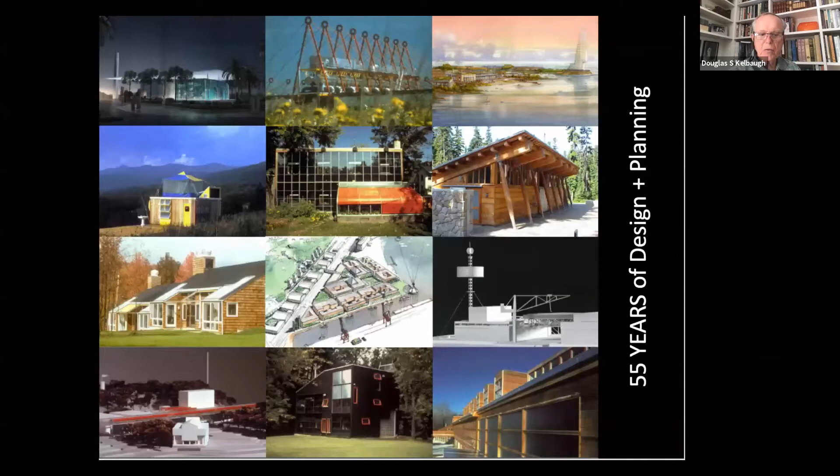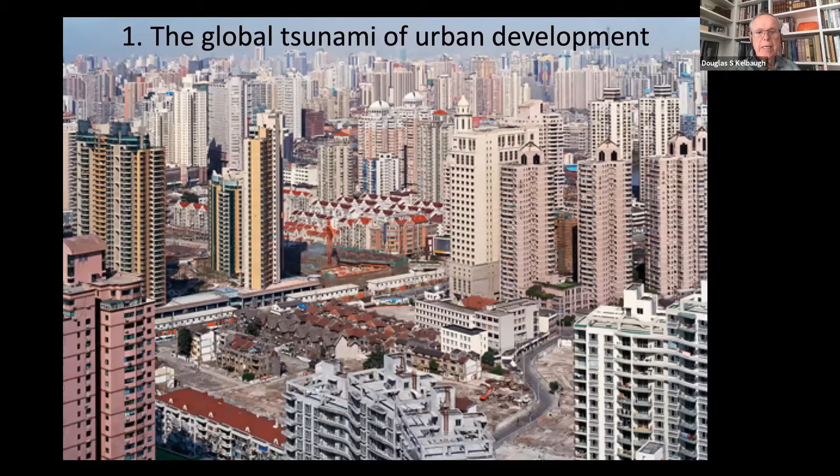Here we see the percentage of global population that's rural dropping as the percentage of urban dwellers increases, about 6.3 urban dwellers to 3.2 rural residents are predicted by 2050. So we're getting more urbanized. 83% of all Americans live within urbanized areas.

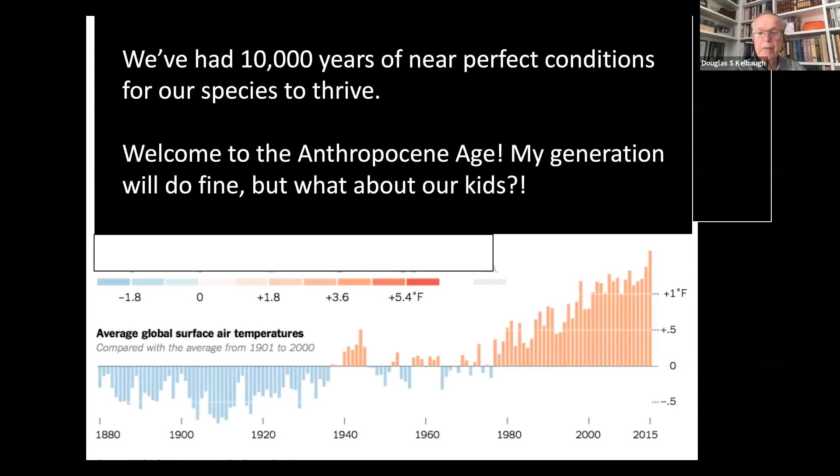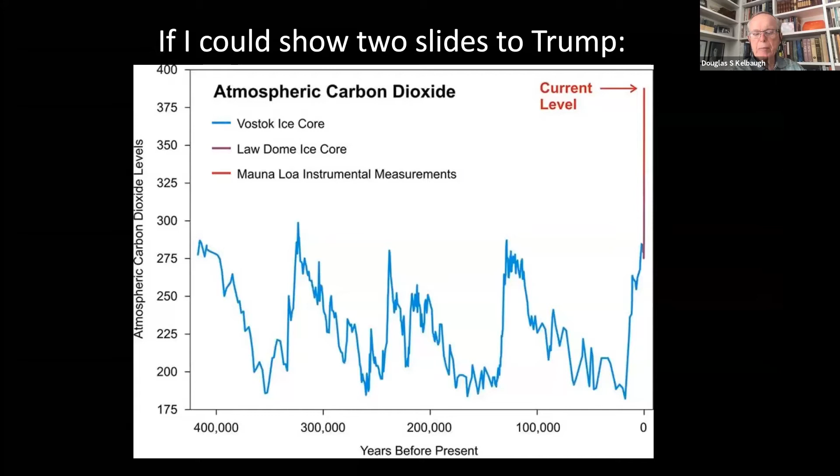If I could show a slide to Trump, a couple of slides, this would be one of them. He keeps saying, yeah, the planet's getting warmer, but then it'll get cooler. We have had that cycle going on every 100,000 years or so for quite a while. But look at the current CO2 in the atmosphere. It's jumped much higher than it's ever been in those previous cycles. So we're in a new terrain.

Ecosystems, unlike organisms, unlike animals, don't have to die. They live for a long time. Think of the ancient cities of Athens, Rome, Beijing, etc. When a bird flies over a city, it doesn't think, oh, I'm over a city now. It sees it as one continuous ecosystem.

Which leads me to a major theme of my book, the environmental paradox of cities. When people cluster in dense, mixed-use cities rather than in suburban sprawl, they have a smaller ecological footprint. There's no doubt about it. Cities have a big eco footprint.

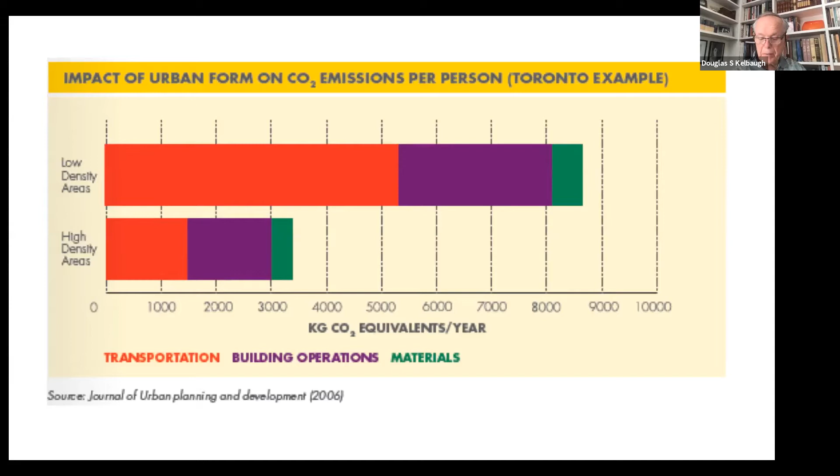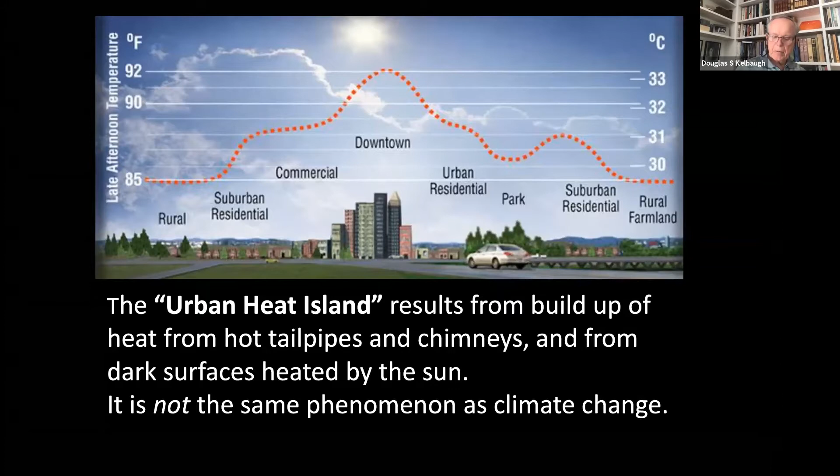So here we go. The urban heat island, you all know what that is, I think. It's much hotter downtown than in the suburbs and countryside because of heat from tailpipes and chimneys and more pavement that gets hot, hotter roofs, so on. Large cities in the US tend to be warming at more than twice the rate of the planet as a whole, or their countries, or their rural hinterland for that matter.

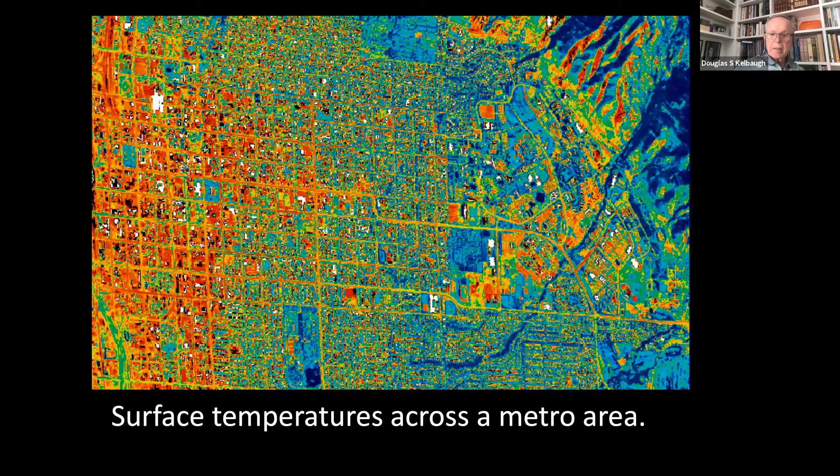Global estimates of climate change are likely to underestimate the rates of warming in the very places where most of the world lives, which is in cities. Here are the surface temperatures, red to cool blue across the metro area, but we're lucky, very lucky.

Strategies to mitigate and adapt to urban heat islands are consistent with, in fact, identical to strategies to deal with climate change. And because urban heat islands are manageable in 5 to 10 years rather than the 50 to 100 years needed to slow climate change, there's a more immediate and palpable feedback. So I think urban heat islands can better motivate and activate people to change their behavior.

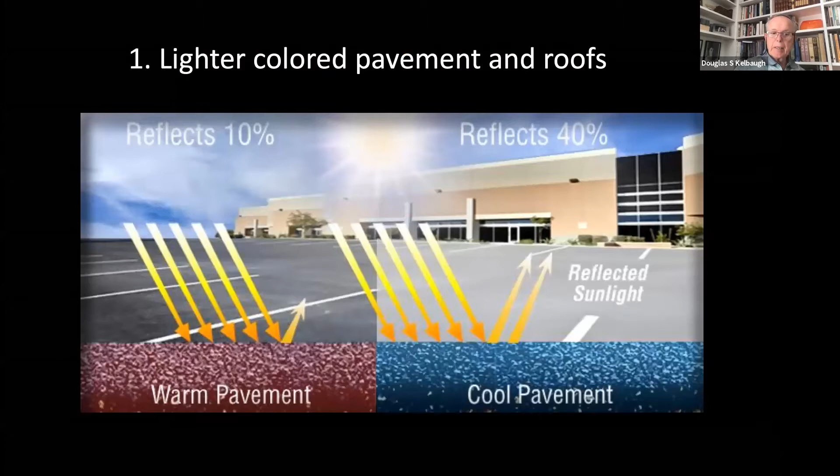And how do we deal with urban heat island? Lighter pavement makes a big difference, 4 to 1 lighter. A white roof is 4 times better than a dark roof. Green roofs with plants are more expensive, but they do other good things, including growing food. White paint is the cheap way to go.

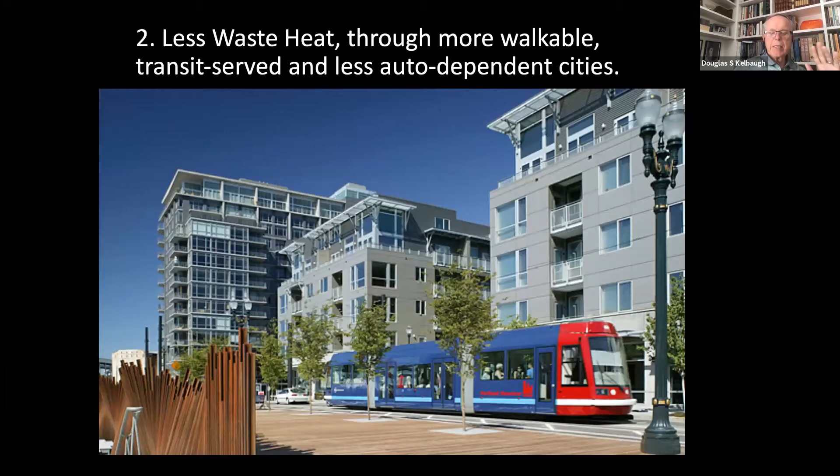So the second is less waste heat. That means more biking, more transit-served communities, less auto-dependent cities. Any of you in Mexico know that there are some bike share systems, actually free bikes that are available in the right place at the right time.

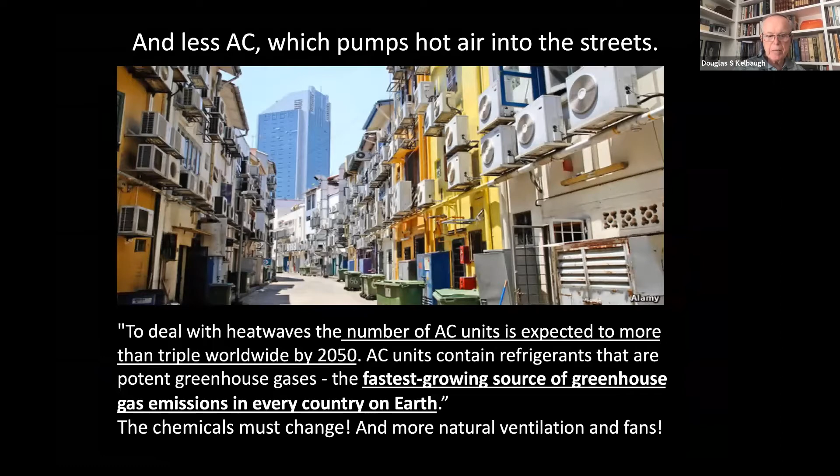AC is a big problem. It pumps a lot of hot air into the streets as it cools individual dwelling units. Dwelling units get cooler, the street gets hotter, and the number of AC units is expected to more than triple by 2050. It's the fastest growing source of greenhouse gas emissions in every country on Earth, developing and developed world. The chemistry of those is deadly.

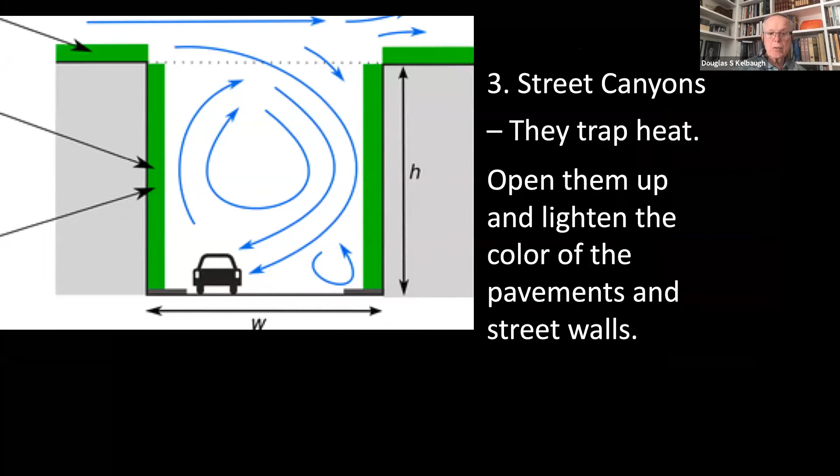There are a lot of reasons air conditioning is a problem. Street canyons, which Harrison originally turned me on to, they trap heat. Obviously, the higher the street walls, the narrower the street, the more heat that's trapped. We want lighter colored walls on those canyons and lighter colored pavements at the bottom.

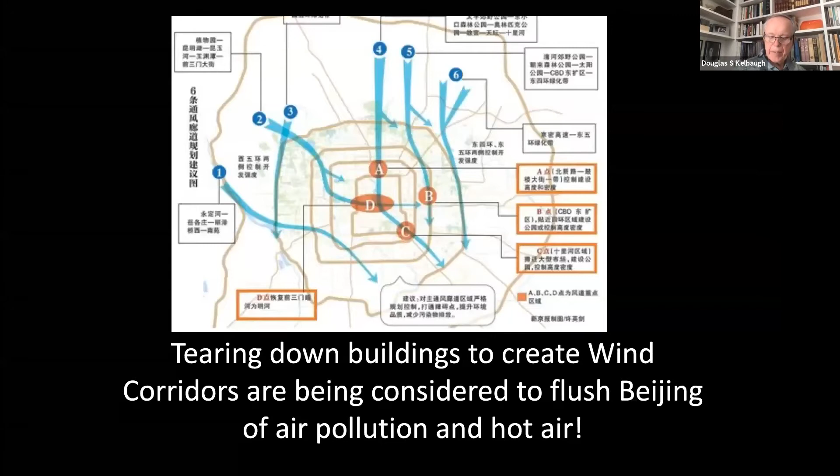So what can you do? You can eat a plant-based diet. You can avoid air travel. You can live car-free. You can have fewer children if you're of that age.

Here's some other ones. Eat locally. Compost your food waste - many cities collect composted food waste. Replace a conventional car with a hybrid or EV. I love my e-bike, but I like my road bike, street bike even more.

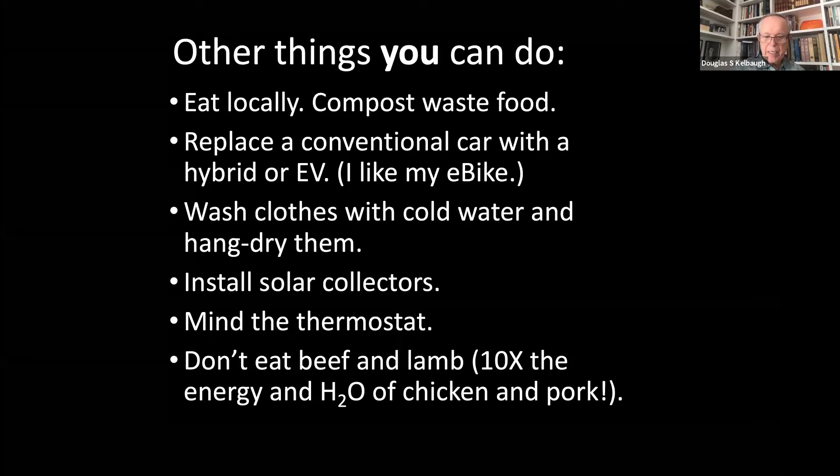Forget beef and lamb. They take 10 times as much energy and water as chicken or pork. I haven't had beef in a long, long time. I'm dying to have a Big Mac at some point. We eat chicken and pork occasionally.

So here's a little miracle that shows we still have more than our share of good luck at exactly the same time. When it became clear that we have to stop burning fossil fuels, a wide variety of other technologies for generating energy became available. We're truly blessed. We are lucky indeed.

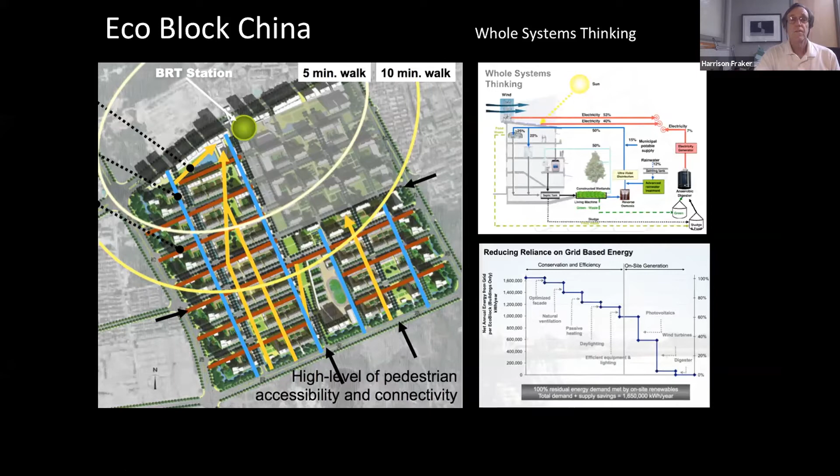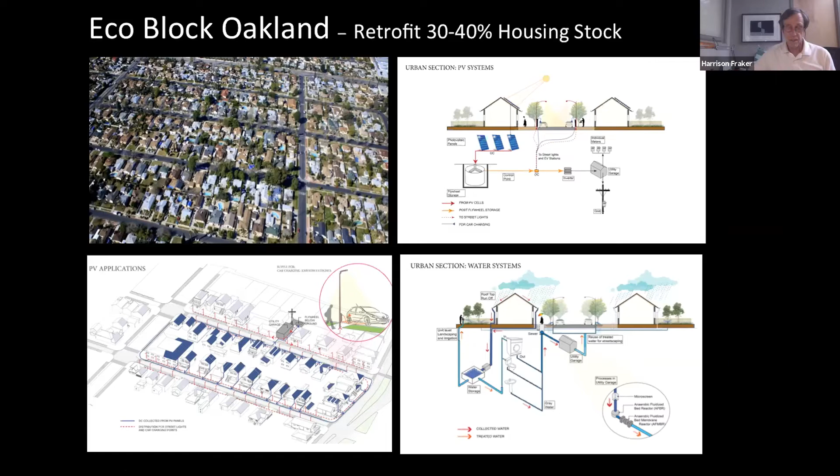But what's really impressive about these projects is the urban landscape, which becomes a really aesthetic experience, treating and retaining stormwater and changing the microclimate.

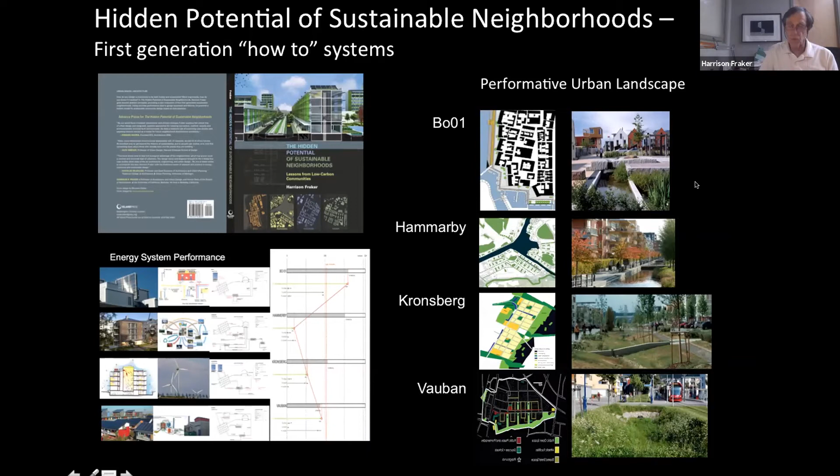What's interesting is in the discourse on sustainable urban design, the sensorial and the aesthetic have really been neglected. And you can see how wonderful that is if you take a look at Scarpa's Biennale courtyard, where you have shade and light, evaporative cooling and evapotranspiration, the sound of the fountain, the smell of the water and the greenery, and you get all of this echoed in the reflection of the fountains on the soffit underneath the shading mechanism. It is a wonderful sensory oasis.

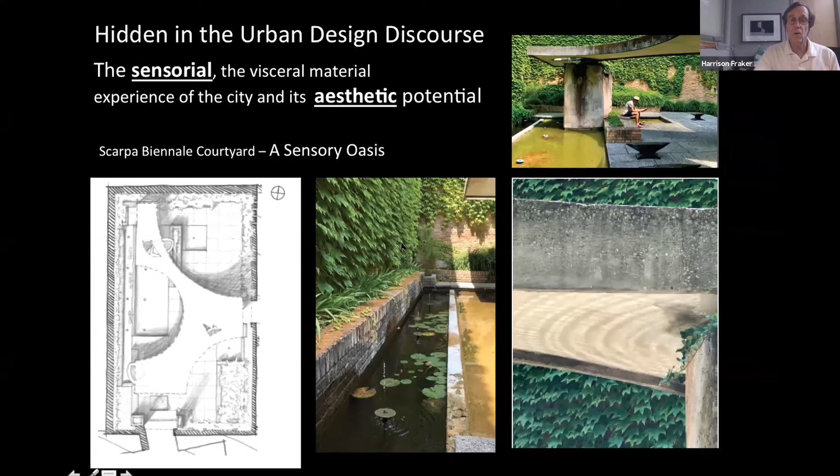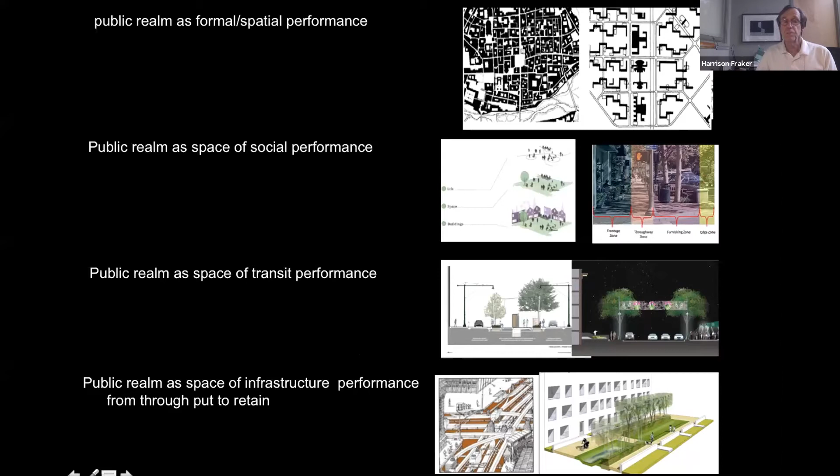The problem has been that urban design in the past has focused on the public realm as a formal spatial game, which is fine, also as a social performance and as a transit performance, all modes, and as an infrastructure which has been primarily to hide it and have it be a throughput system. What's been left out is the amazing environmental performance of the urban landscape.

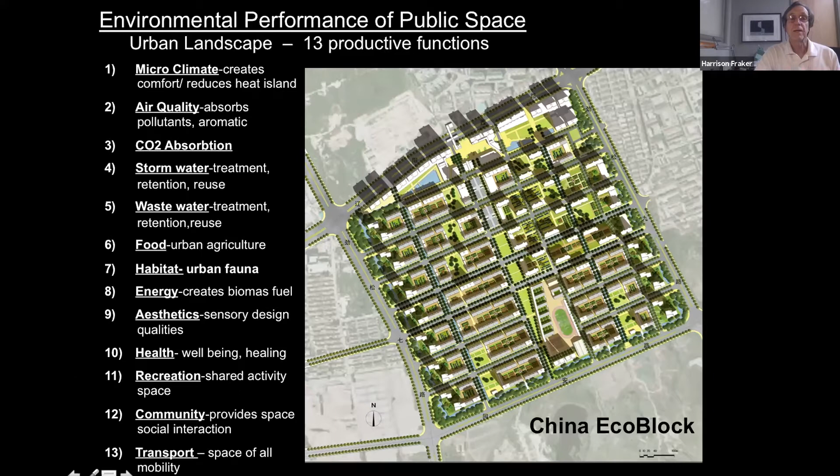It's 13 productive functions. If you look at the first 10 - microclimate, air quality, CO2 absorption, stormwater, wastewater treatment, food, habitat, energy, aesthetics, and health - these are really underdeveloped. The last three, recreation, parks and plazas for community and social interaction, and transportation, are the ones that we focused on. But these other ones are just sitting as a huge opportunity.

And it turns out that streets are 35% of the total land area, or 75% of public space, and they're an underdeveloped opportunity for environmental performance just waiting to happen.

One of the ways to look at this is not just plan, but to look at the environmental section as the space of environmental performance. And as Doug has shown, it's been a dumping ground for waste heat from air conditioners, for trapping solar radiation, hurting the heat island effect, and collecting waste heat from vehicles.

But if you look at it as a whole, the urban section demands building envelopes and the public space as an integrated whole, rethinking all the surfaces and systems. So let's take a look at them.

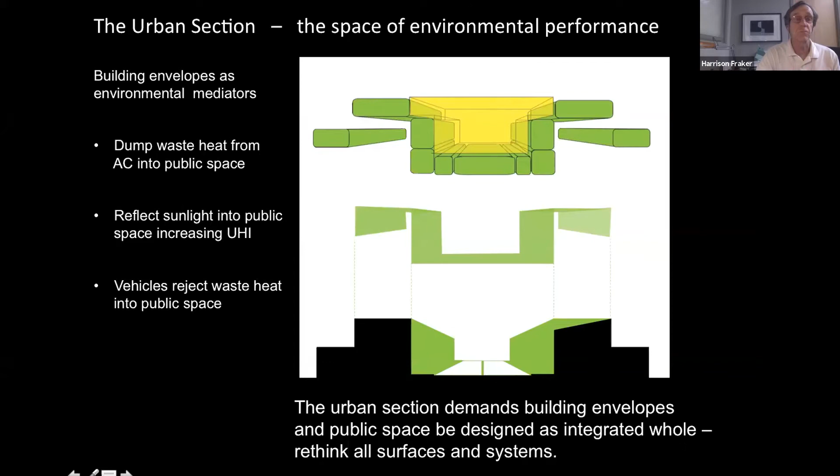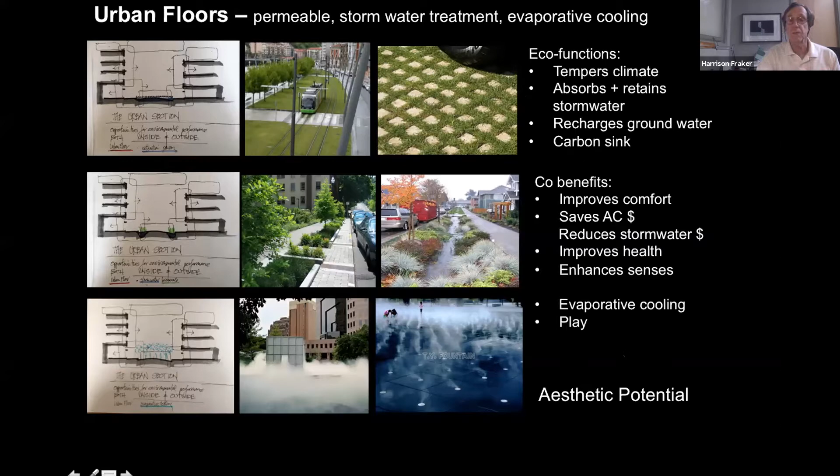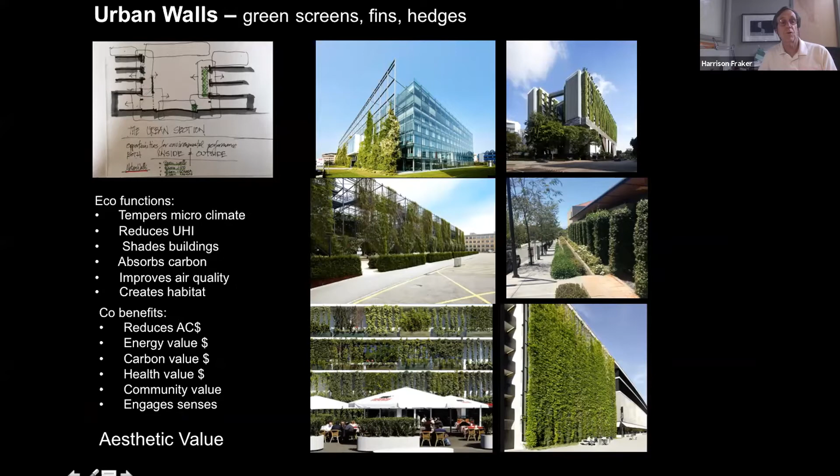Urban floors can provide all these wonderful eco functions if they're not just plain concrete, and they have tremendous aesthetic potential. The same with green walls. You can have screens, various ways of deploying these on buildings to shade them, temper the microclimate, reduce heat island, absorb carbon, improve air quality, create habitat, and they have tremendous aesthetic value.

Doug has talked about trees. They are truly spectacular because they change seasonally. They provide all these amenities and wonderful sensory things: smell, dappled light, the changing colors in fall, the sound of leaves on the ground—fantastic aesthetic value. And if we really took advantage of the urban forest, we could draw down 10% more CO2 emissions.

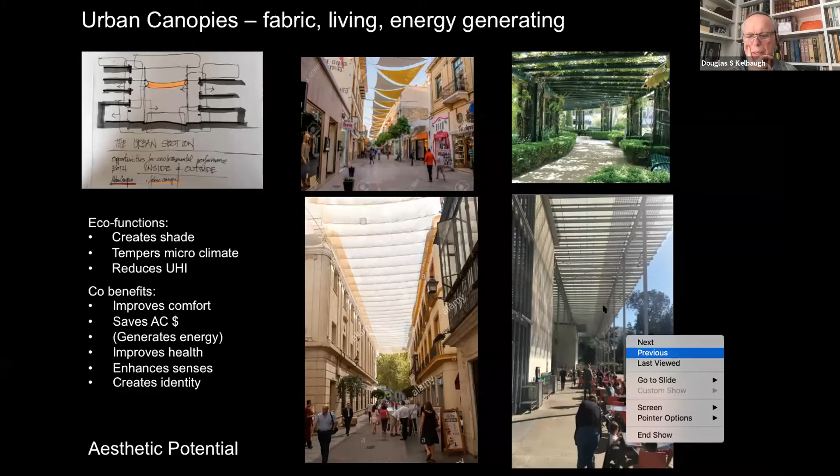Two minutes, two or three minutes. Yeah, well, I want to go down.

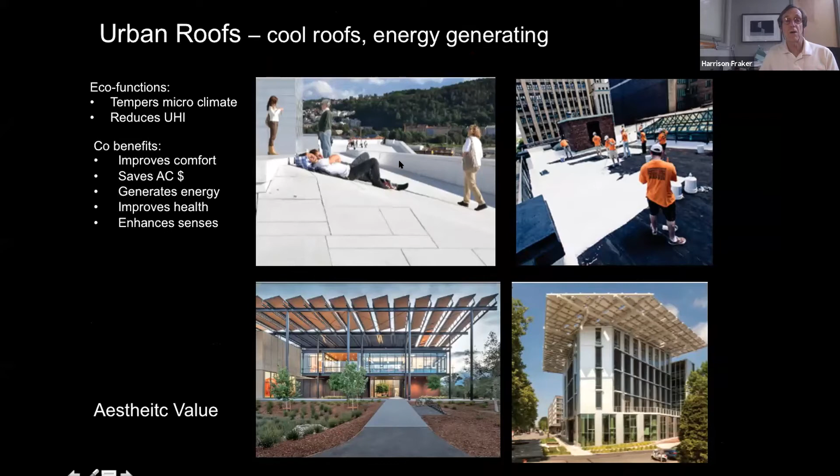Here we go. Doug's talked about white roofs. They are the cheapest way to do it. You can also occupy them, which is wonderful, but they can also be used to generate energy. And then, of course, he's talked about the value of green roofs where you can grow food, create actual flower growing places, and even create a whole new neighborhood community at that scale. So they have social and aesthetic value.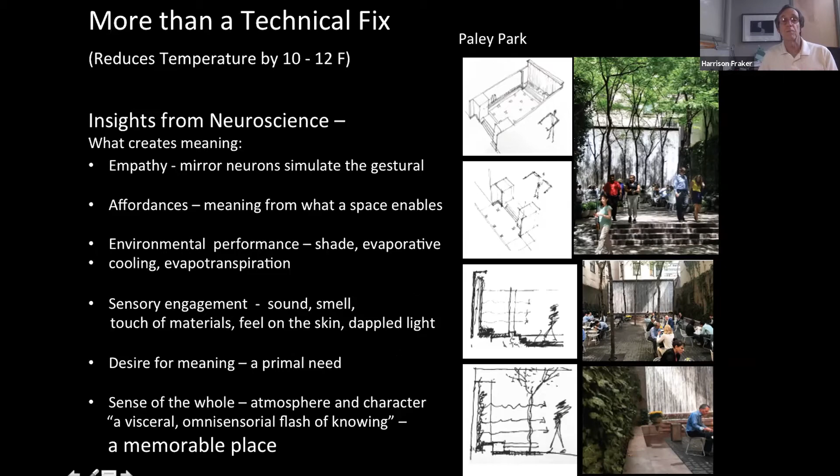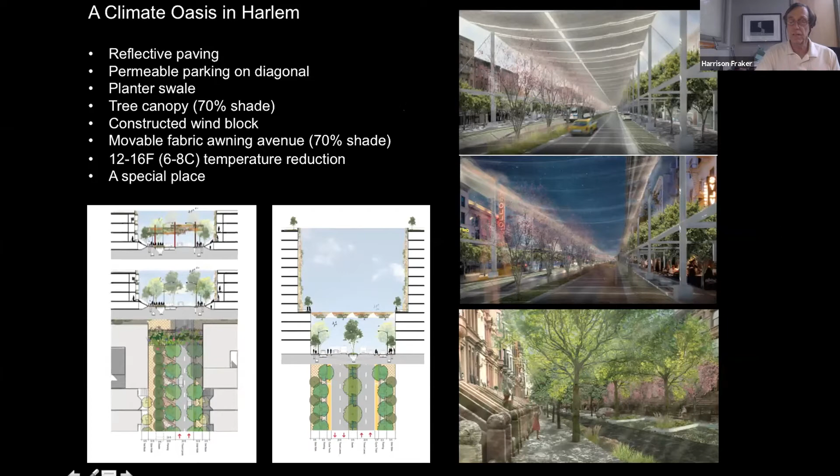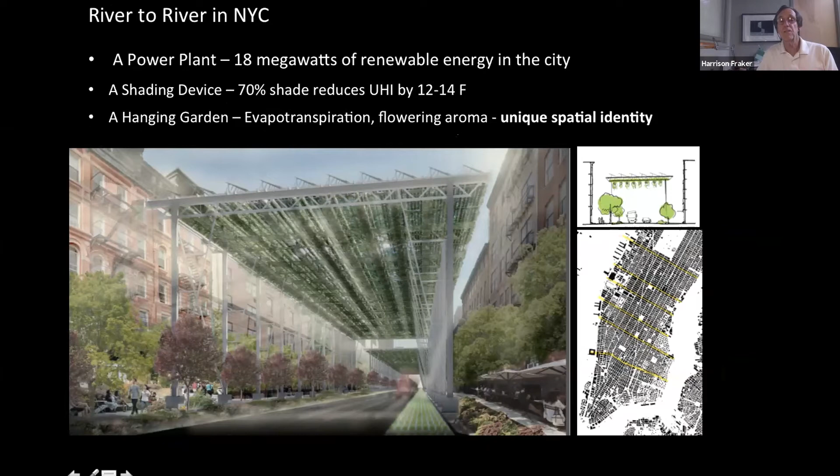And you could even do this on cross streets in New York. You could turn these cross streets into a power plant, generating 18 megawatts of renewable energy, a shading device which reduces the heat island by 12 to 14 degrees. And then you have this wonderful hanging garden, this amazing place, a completely unique spatial type that links the river to the two rivers.

So in closing, let me say that unlocking the creative, sensorial, and poetic potential of these sustainable systems is in its infancy, and it could create an amazing new urban design toolbox. If you want to learn more, take a look at this book coming out in the fall, Minding the City with New Sensibility for its Latent Potential of Environmental Performance, which really can create a more sustainable, humane, and meaningful city.

Thanks a lot. Good job, right on time.